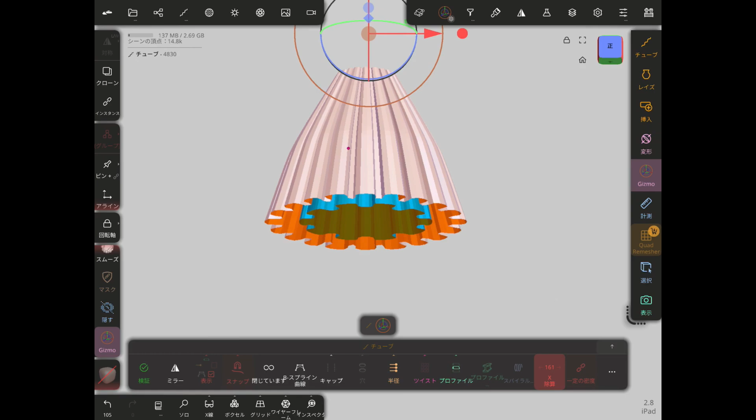It's a simple method using the Tube Tool's Profile feature. Because we're using a tube, you can easily change the skirt shape by adjusting the radius. This time, we will create two types of profiles. If you simply change the skirt size using the radius, the pleats will get bigger and bigger, and it will lose that petticoat vibe. So we'll create one profile for fine pleats and another for larger pleats.

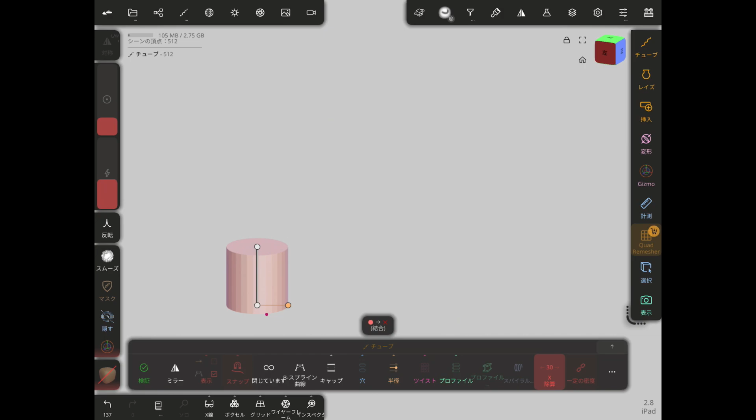Go to the Add menu and add a tube. Tap Profile in the Edit bar. Tap the Expand icon. Enable the X and Y planes.

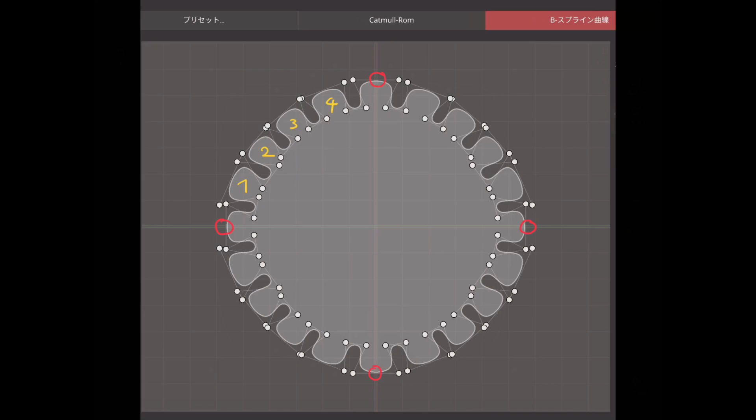Tap the two snap icons to disable them. Tap the black dot to enter Curve Edit mode. Tap on the curve to add edit points and create the shape. Edit the profile so that there are 4 pleats between the X and Y axis pleats.

Once the shape is done, tap Preset, then New to save the profile.

After saving, we will make the profile for the larger pleats. Delete every other pleat and adjust the shape.

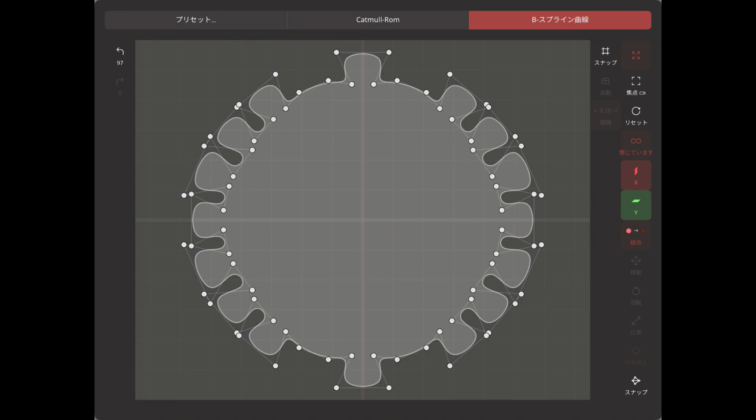Once this profile is ready, save it by tapping Preset, then New. Tap the Expand icon again to finish editing.

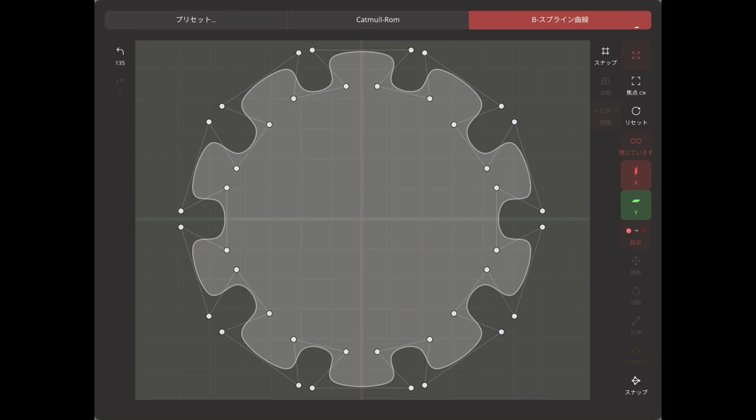At this stage, the tube won't match the preset shape yet. Increase the X division value in the Edit bar to make the shape smoother.

Tap on Cap to remove the caps. Open the ends. Adjust the radius to shape it into a skirt.

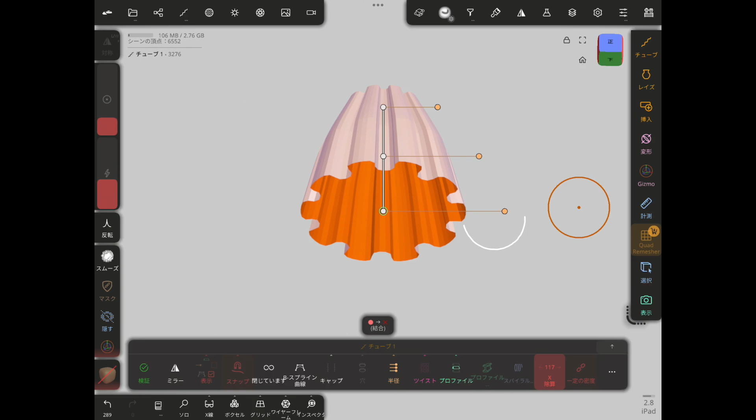Now let's build the petticoat. Duplicate it from the Scene menu using Clone. Increase the radius so it sits wider than the first layer of pleats. Tap the Gizmo tool and rotate the pleat slightly to give it a more gorgeous, voluminous look.

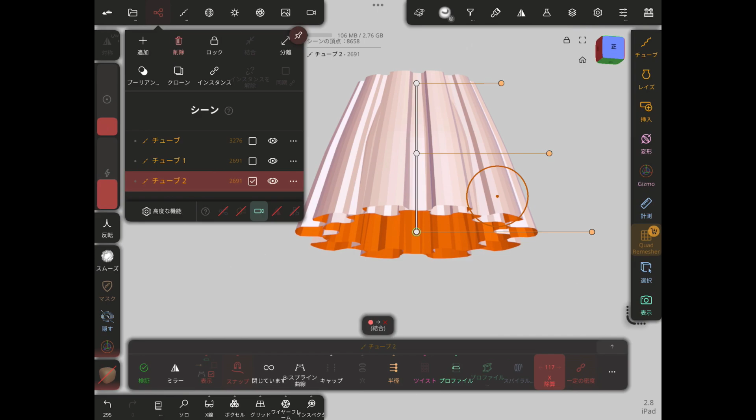Create a third layer of pleats using Clone from the Scene menu. Adjust the radius. Since the pleats will look too large now, change the profile back to the fine pleats profile we made first.

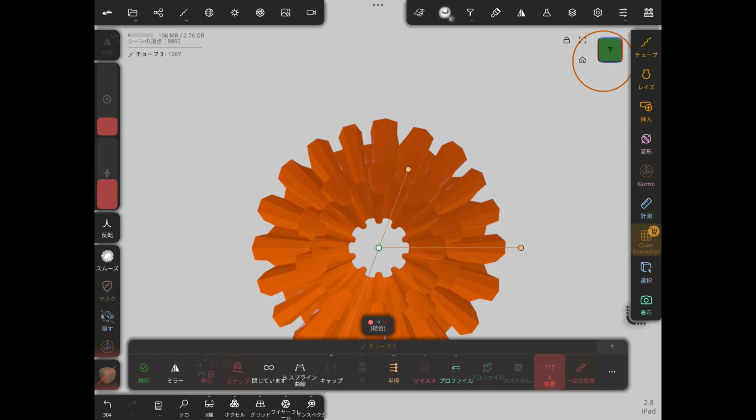Create the fourth layer in the exact same way. Once the overall shape is complete, validate all of the tubes.

Now let's add thickness. Tap SelMask and enclose the object using Rectangle mode. Tap the SelMask settings on the top right bar. In Extract mode, adjust the skirt's thickness using the Thickness slider.

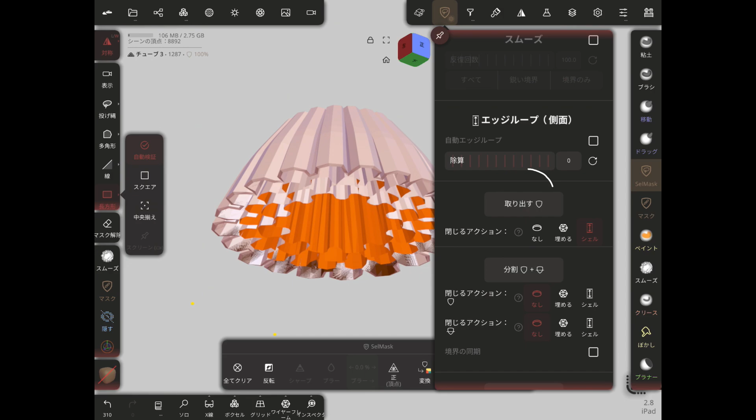Tap Extract. Repeat this process for all of the objects. Once you have extracted everything, go to the Scene menu and delete everything except the objects with ext in their names.

The shapes might not be perfectly smooth yet, so go to Multi-Resolution on the top bar and tap Subdivide about 2 times.

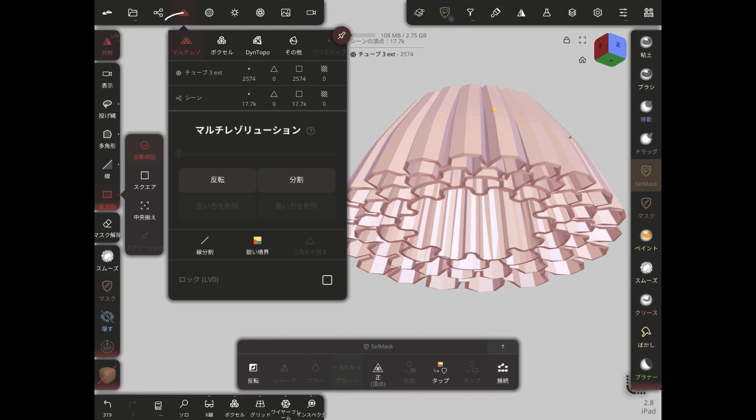The petticoat is complete. The profiles we made today can also be used for sleeve frills or various other skirt shapes, so creating them once is super convenient. Thank you for watching.